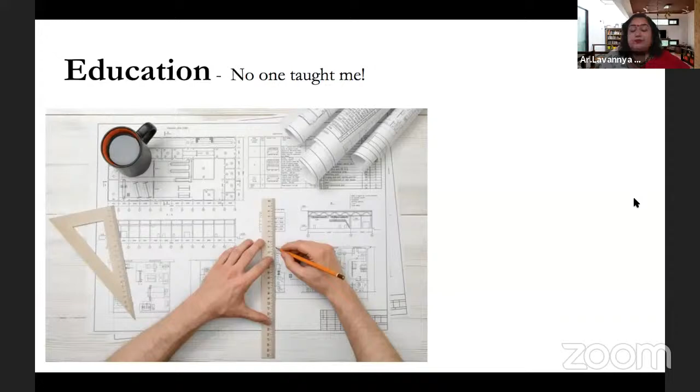One is, of course, education. Unlike today, now that we are so much more aware that we are having this conversation, the education system hasn't really taught us about anything that can sustain or last until now. There is this perception of the pakka and the kachcha house, that I cannot live in a kachcha house, I have to have a pakka house.

And the whole story about the three piglets, where the wolf destroyed all the houses in mud and straw, but could not destroy the one with brick and concrete cement, right? So the perception is that anything built in any material but cement and concrete cannot be good.

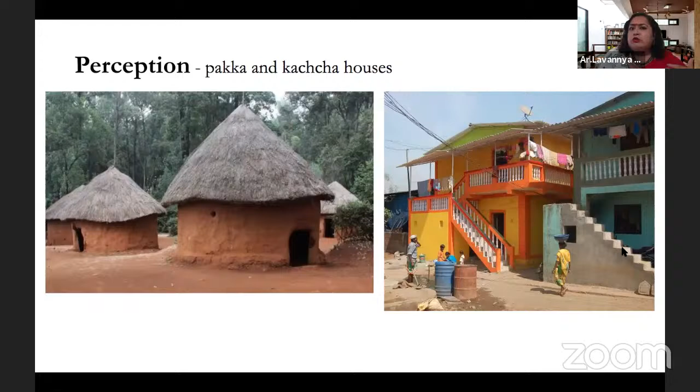And then you have this deliberate ignorance, which is created by the media and the corporations, where you see Bob the Builder having these big equipments, big constructions, looking at steel and cement and concrete. And there, again, there is no conversation about sustainability. That is an ignorance that has been put into our minds because the corporations want to sell a certain material that is going to help a very select part of the community.

But I would like to go back and look at all the history that we had, and as a country, how much we already know and how much we've already practiced traditionally in terms of sustainable construction. Do you recognize what building this is? If you do, just put it into the chat box.

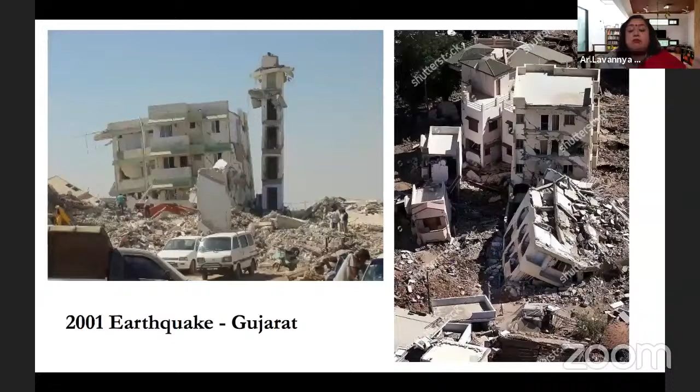This is a bhunga, which are very common in Kutch. In 2001, when I was in Gujarat, we had an earthquake, which was pretty huge. What we observed was that every other structure built in concrete and cement had in fact fallen down, and a lot of them very far from the epicenter were destroyed. But the bhungas stood still. They did not get hurt. Isn't it curious to understand why that could have been?

A lot of the bhungas are made with the soil that is available right there, with leaves and palm leaves and bamboo that they get right around there. And then all these beautiful decorations are done with the mud and dung from the animals they herd.

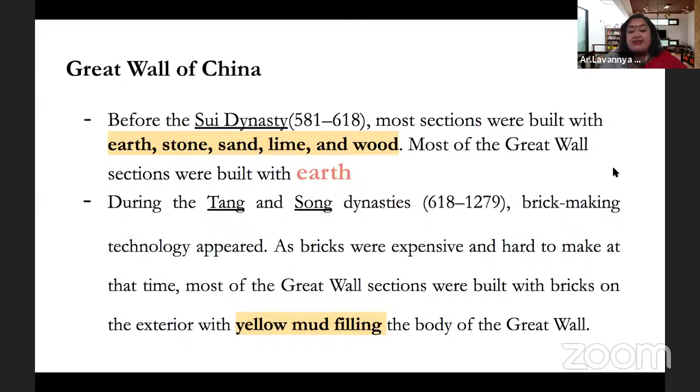So what are the benefits of traditional construction techniques? One big advantage is it is with the locally available materials. So you don't have to go very far to look for anything. It is climatically appropriate design, meaning it is designed thinking that this is right, this will keep me comfortable. And it's very logical. Everything that you build the space or the building or the structure with can go back to the soil or go back to earth very easily once the building is no more needed. And therefore, the waste that we were talking about in the video we saw right now automatically minimizes or goes away.

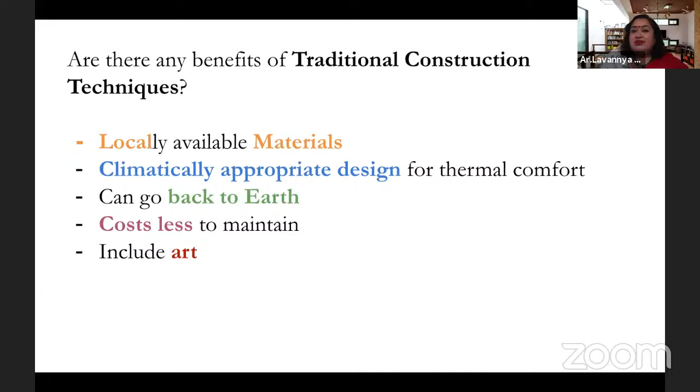Why are we discussing this? The reason that we're discussing all of this is because the architecture and construction industry contributes to more than 36% of the global energy use and more than 39% of the carbon emissions annually. And in India, we generate more than 10 to 11 million tons of waste annually as a construction industry. And as architects and engineers who are learning and want to make the world a better place, the question is, are we really committed to making the world a better place, or just a bigger landfill of waste?

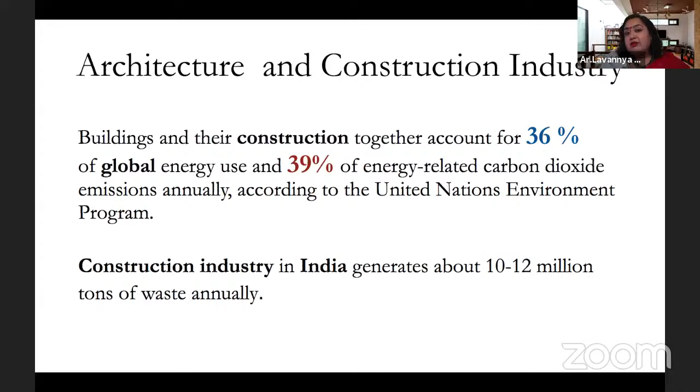But there's also a contradiction here. In a country like India, 9% of the GDP comes from this construction industry. So the country is doing better because of this industry. And more than 44 million workers are employed because of this industry. It also helps the workers and the labor community step up the socio-economic ladder. So we are also adding value. And if there is a contradiction where there is waste and there is harm and there is good, then what is the way out of all of this?

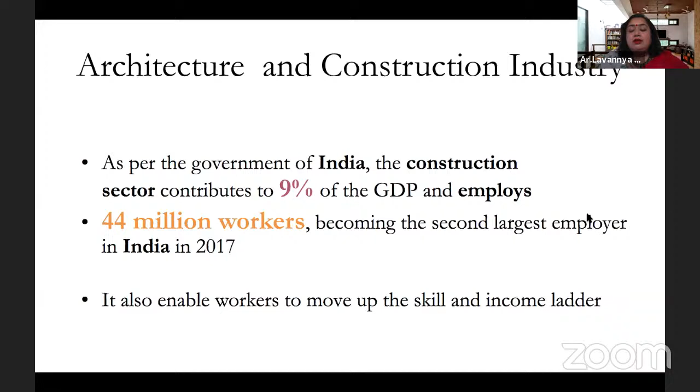There is this area of innovations in the construction sector that is desperately needed, where we reach a more sustainable way of solving these problems, not creating waste, but still adding value to the lives of the people we live with. And for that, we have a very simple formula that we usually follow. In short, we call it RALIS. You can call it RAILS. It's up to you. Where one, as designers, we learn to minimize the requirement itself. Ask people to think, do you really need this?

Look at everything from a climatically sensitive approach. Be advised by the traditions, and then innovate them. Because we already have traditional knowledge. All we have to do is just innovate that. Pick that up, make it something more interesting. Use everything that is locally available, and that doesn't mean in the neighbor's shop, right? Especially when you live in a city, that is usually the problem, that everything is available, but it is not about just that. What was locally easiest in terms of availability?

When we do a site study, for example, before we start designing a building, we look at the site, and when we write down the materials available at the site, the first material available is earth. And include the local skills and the craftspeople, because it is important that their knowledge and their acumen also get incorporated into the building construction and design. Also, they should be able to learn and be able to do better.

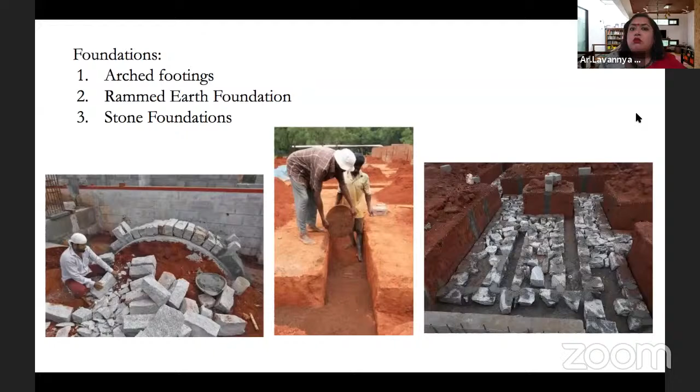How do we choose alternative construction techniques? And now we come to the real main agenda of this webinar, where I'm going to start talking about what is it that we can really do. Foundations, for one. Every building has a foundation, has a wall, and has a roof. You can look at foundations all over again. As a designer, you can start designing very sensitively, thinking about what kind of foundation you are going to choose and why you are choosing that and how that's going to affect the design and therefore the outcome. From arch foundations to rammed earth foundations to stone foundations, you can choose a whole lot. Everything is not about column footings and beams.

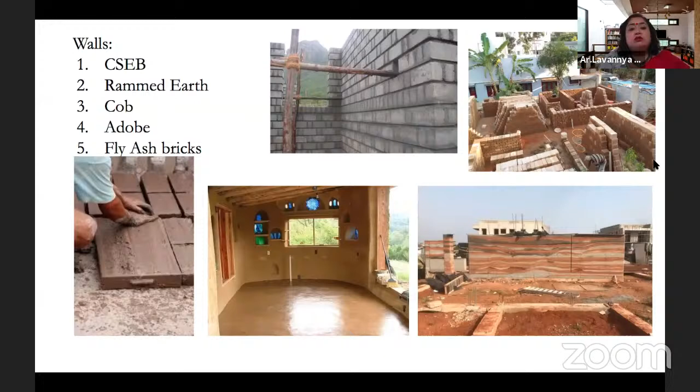Walls can be your CSEB or stabilized mud blocks, rammed earth, cob, adobe, fly ash bricks, wattle and daub. The choice is numerous. Depending on where you are, what you are going to get, you can choose several types of different materials to build the building's walls with. And the roofs can be a whole lot of variety as well. I'm just jotting down a few right now. Let's say filler slabs, domes and vaults, arched panels, jack arch roofs and flat panels. All of these systems incorporate a whole lot more local material and a lot less steel and concrete. And why is that of a concern to us? As we go into filler slabs, you will start understanding.

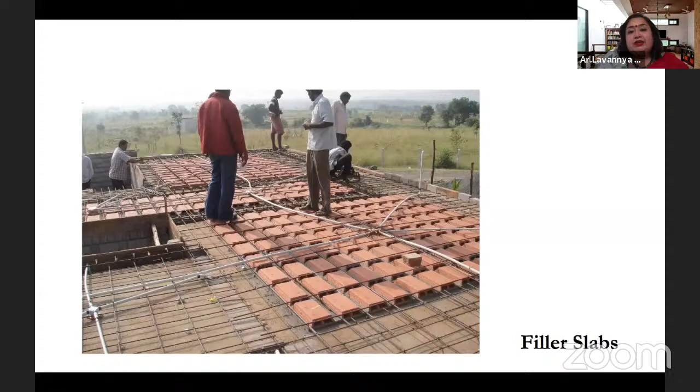You ready the roof, you have your shuttering. There are so many varieties of shuttering that you can do. You ready your shuttering, you put these filler materials, and then you pour the concrete on top. And then when you take off the shuttering, you see the pretty filler material underneath. It's called a filler slab because it's filled in. So you might have three questions, and this is what I'm going to answer today. What are filler slabs? Where can I use these filler slabs? And how do I go about designing them?

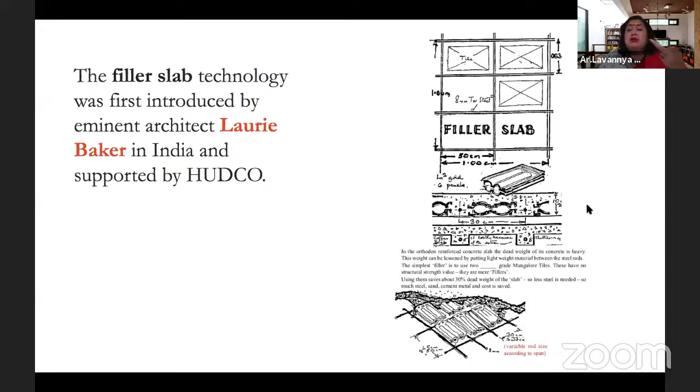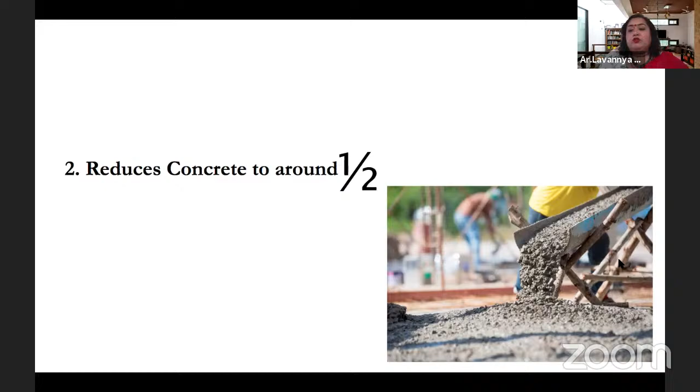What ends up happening is you're able to halve the amount of steel and halve the amount of concrete that goes into making these filler slabs. The steel becomes less because the module of the filler material is much larger. So usually you would have the steel at every 5 or 6 inches, and in this you would end up having it at double the distance. And the concrete also becomes half because the filler material itself is about 2.5, 3 inches. So half the slab is essentially the filler material.

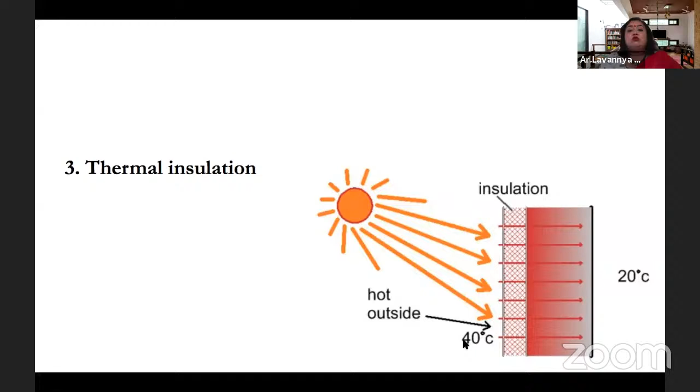And then the third huge benefit is the thermal insulation, because of this air gap. If you go back to school, you remember that air is a bad conductor of heat, right? And because you're giving an air gap in the roof, you are bringing in insulation. And doesn't that really become a big benefit? Because most of the heat into a building is transmitted through the roof, and the walls do a whole lot less. So if the roof is responsible for the maximum heat, we want to be able to bring insulation into the roof itself, right? That's where it becomes green.

This is a definition, and you can just take a picture of this and keep it in mind. A filler slab is based on the principle that in roofs which are simply supported, the upper part of the slab is subjected to compressive forces because that is where the load is being carried, and the lower part is experiencing tensile forces, where it is not really serving a whole lot of purpose. And therefore, you replace the lower part with the filler material and allow the upper part to have the steel and the concrete to take care of the compressive force. Because if you go back to your understanding, concrete has very good compressive strength. It is steel that brings in the tensile strength, right?

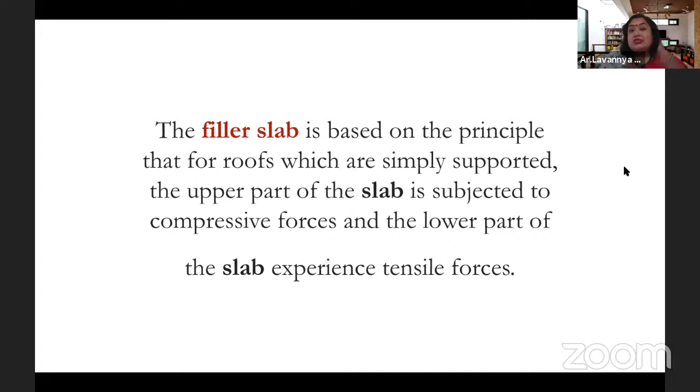The next question is, where can I use these filler slabs? For any kind of a slab, in reality, you can use it anywhere, mostly in simply supported slabs, but even otherwise, you can play a lot with filler slabs. You can bring in a whole lot of different kinds of filler materials to play with the design, which is otherwise so boring with the regular concrete slab, because it's just flat, monochromatic, one kind of material, whereas here you can play a whole lot with textures and materials.

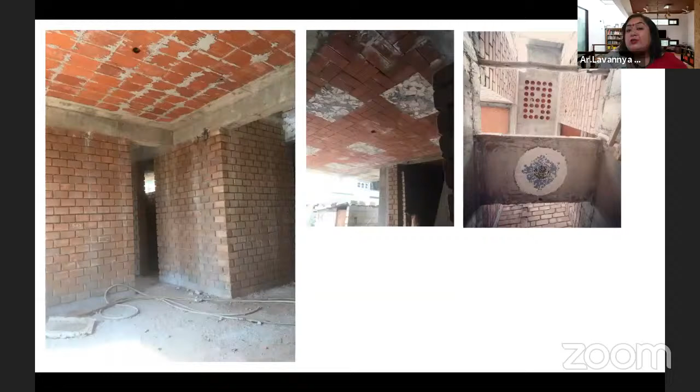For example, in this project we did in Gujarat, there was this old Gymkhana building which was 100 years old, and most of the tiles were broken by monkeys jumping on them. That same tile size wasn't available, so we were not able to replace them. But when we did a new structure on the same campus, we decided to take up all those Mangalore tiles, replace the whole roof altogether, and utilize them as filler material for the new slab. In the process, we were utilizing material that was getting wasted, and also bringing the amount of steel and concrete down.

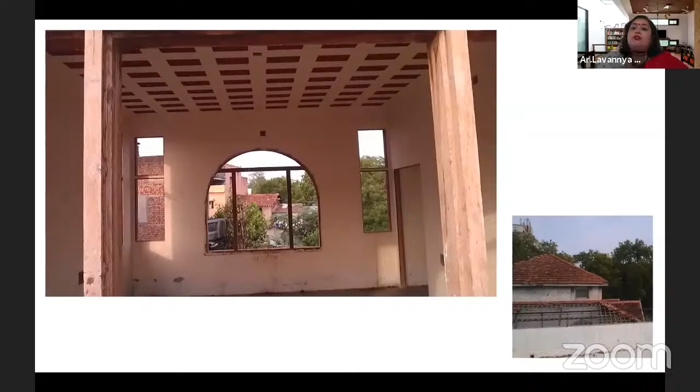So how do I go about designing them? The third question. There are three things to look at: one is aesthetic, second is structural, and third is the executional aspect. Especially we designers want to know what you can do aesthetically to add value. So you can utilize terracotta tiles of various sizes, plastic waste, coconut shells, a whole lot of creative ideas you can bring into play.

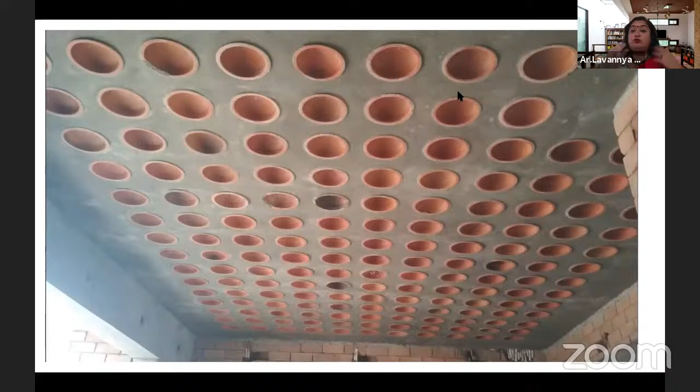One is, of course, these Hourdi block tiles. You can add a spacer so that there is a grid that you create, or you could make them all in unison, like I showed you earlier. In Pune, we did not find Hourdi blocks because they're only available in the south, but we found other kinds of tiles, and then we added a matka on top to create the air gap, which you can't physically see, but it still serves the purpose. And the Hourdi blocks, when placed close to each other without a gap, look like so. You can add kadhais and matkas to the roof to bring in a very interesting visual appeal.

This is how you can use Mangalore tiles, which is what we have learned from Laurie Baker. And then Mangalore tiles are used as a sandwich, by the way. And then you see some amazing work that Daniel is doing, and you can see these coconut shells that he's using as a pattern to be able to create visual interest also into a filler slab. So it's a big platform of a variety of things you can do.

This is what Chitra's office had done, where they picked up all the keyboards that were being thrown away by the neighbor who was repairing computers, and sandwiched thermocol on top of it. And thermocol is also waste that does not have another purpose and cannot go back to nature in any manner, but it brings excellent insulation. And then sandwich the two and cast the concrete on top, and you get a very interesting roof there.

So yeah, you'll see that aesthetically, it is up to you as a designer what all you want to play with, because there's so much to play with. Your mind is also thinking, can this waste go back to the roof? Because if a building can absorb all the waste that it is creating, how wonderful is that?

The second thing is the structural aspect, because that is a concerning aspect for a whole lot of them. A lot of structural engineers are still not very open to alternative building technology. Unfortunately, they also haven't been taught, or they haven't learned the art of it. And therefore, I want to be able to discuss this very keenly.

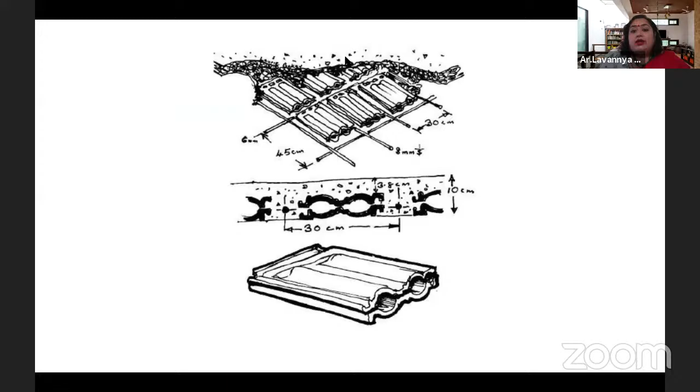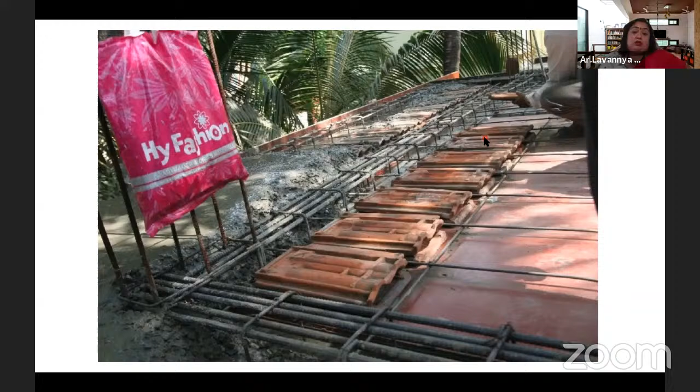And if you've ever done the calculation for an RCC slab in the structures class, you would know that you have to assume a thickness of the slab to be able to start computing the load and eventually the thickness of the slab, and then decide that, okay, it's going to be this bar, this reinforcement against this thickness. So if you started with a 5-inch assumption, you may end up at a 6-inch slab.

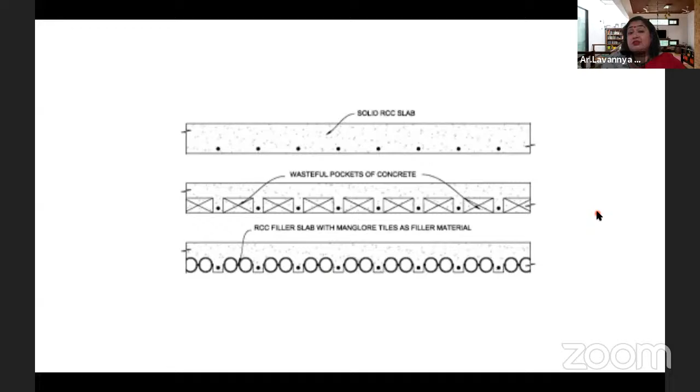So this is a part of the execution. Like I was saying, structurally, because the slab is now losing most of its part to a lightweight material, the slab and its requirement for steel also becomes much lesser now. And that itself is also a huge benefit, because not only are you using a thinner reinforcement, you're also giving it a whole lot of spacing, which was not there initially.

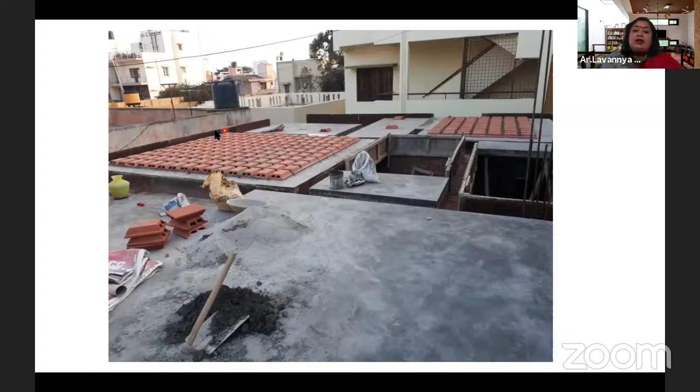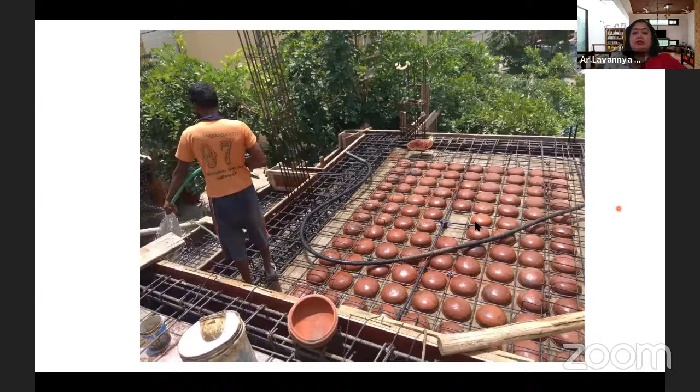In terms of execution, you would create a surface with the centering and the shuttering, arrange the tiles on top of it, and pour the concrete on top. It's as simple as that. And your material can be anything that you get excited by. Your steel, your electrical points can run into this, and then is when your concrete can arrive.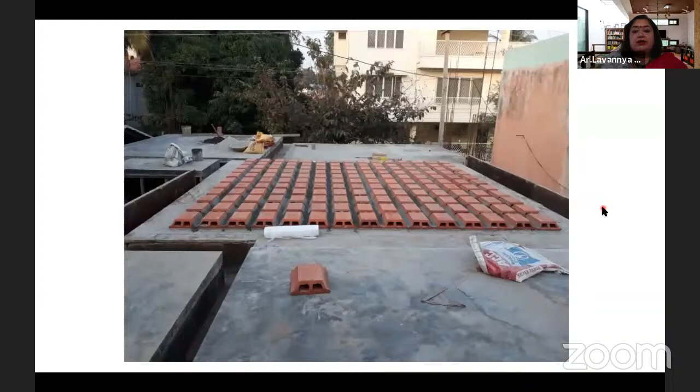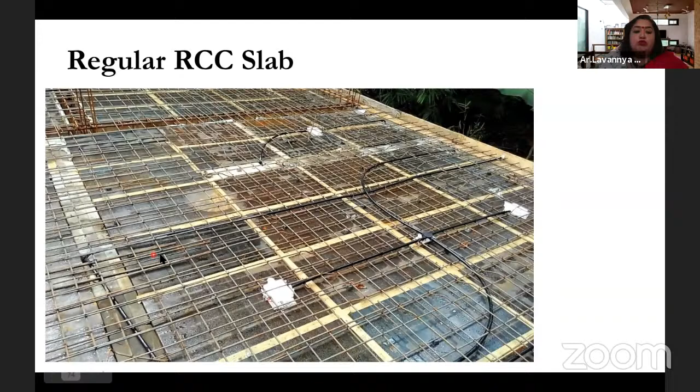And then you end up finishing it from the bottom, cleaning it. You may paint it with a terracotta-based material, and that's what the end product looks like. This is, of course, your regular RCC slab with the conduits of the electrical going through, such a lot of steel that goes into play. And it looks so boring because it's just one flat, regular concrete slab, but this is what a filler slab can look like, and it costs you half the money.

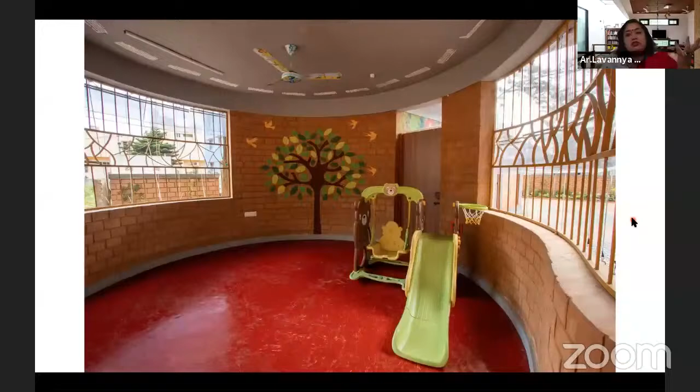And that's all you can do to play with it. So these are all the examples that I wanted to show to you. A whole lot of this is a play school we did, where we again had a kabadiwala right next door. So we picked up all the keyboards from him, and then we added that as an interest visually, because children, being children, get intrigued by everything around them.

So these are the following takeaways that I feel you can note down. One is that any kind of slab can be replaced with a filler slab. Again, filler slab with concrete is not a necessity. There's also a composite way of doing a filler slab. You have a lot of aesthetics that you can play with vis-a-vis a regular concrete slab, and then it adds value. It reduces the roof's carbon footprint, which is so important. It reduces the amount of steel and concrete that goes into the roof. You can play with a lot of forms also.

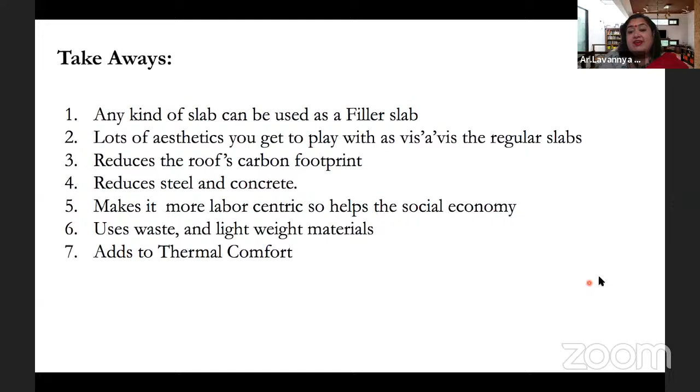It becomes more labor-centric, and therefore it helps the social economy, because a country with the size of population that we have needs to help a lot more people than to help just the merchants and the vendors become richer. It uses a lot of waste and a lot of lightweight materials that again adds a lot of value. Terracotta-based materials, which brings in social economy, improves in the process. And it adds a lot of thermal comfort, which is a big gain. So if you have a reason to not do a filler slab, you want to think again today. So why should you not do it, right?

I'd like to end my talk by saying this, that I cannot do all the good that the earth needs, but the world needs all the good that I can do. So let's see what is the best that we can do.